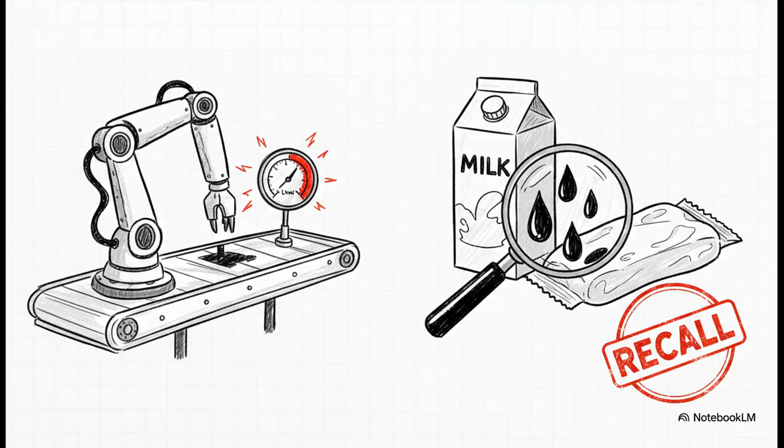Picture this. Alex is on the factory floor. Alarms are blaring everywhere. The production line, which was this perfect symphony of automation just minutes ago, has gone completely silent. Alex is smack in the middle of a full-blown shutdown, and the pressure is seriously on. So Alex is dealing with a double whammy here. First, the easy part. Pneumatic actuators are failing all down the line because the system's air pressure is just tanking.

But the second issue, it's so much worse. Quality control has detected trace amounts of oil in the product. This isn't just a shutdown anymore. We're talking about a potential recall that could cost millions and wreck the company's reputation.

Okay, so what do you do? A less experienced engineer might just run straight to the compressor room and start tinkering. But Alex knows better. The compressor is the heart of the system, sure, but the problem could be anywhere in the system's arteries. So the first step is a full system diagnosis. Alex knows better than to guess, so the approach is super methodical.

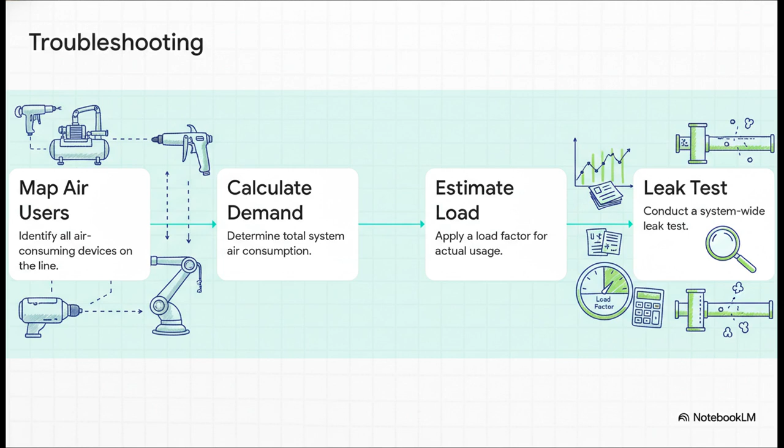First things first, you identify every single device that uses compressed air. Then you grab the manufacturer data and calculate the total potential demand. Of course, not everything runs at once, so you apply a load factor to get a more realistic picture of usage. And finally, the most critical step of all, conducting a system-wide leak test while everything is shut down.

So, okay, the leaks explain the pressure drop, for sure. But what about the oil contamination? Now that Alex has a clear picture of the system's massive demand, which is way bigger than it should be because of the leaks, it's finally time to turn to the source of it all, the compressor itself. And here is the culprit.

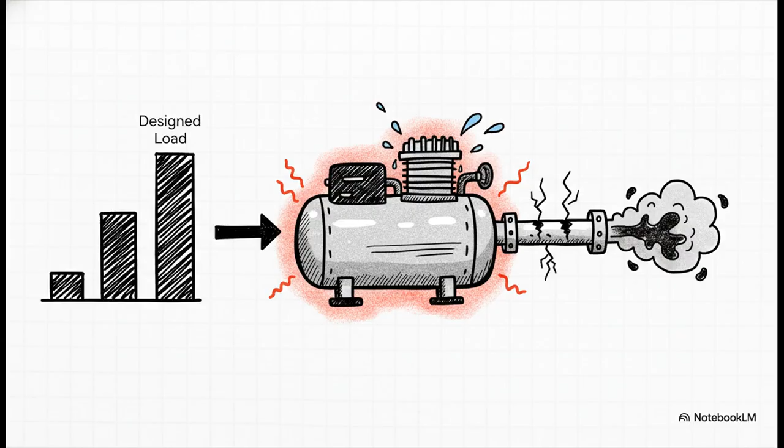See, the compressor was sized for the original designed load of the factory, but after years of these tiny leaks adding up, the actual load is way, way higher. The machine is running constantly, 24/7, just to keep up, and it's overheating. And as it overheats, its oil-based lubrication starts to break down and get carried over into the airstream. That's our contamination. So a replacement is definitely needed.

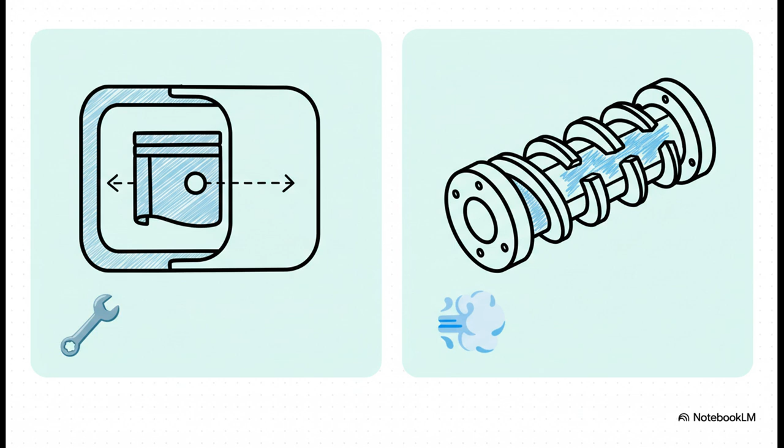Let's look at the main options Alex is considering. This slide compares the two most common types of positive displacement machines. On one hand, you have your reciprocating compressor, which is kind of like a car engine's piston. Super efficient, but it can be a bit high maintenance. Then you've got the rotary screw. It's compact, gives you a nice smooth output, but it can be less efficient if you're not running it at full load.

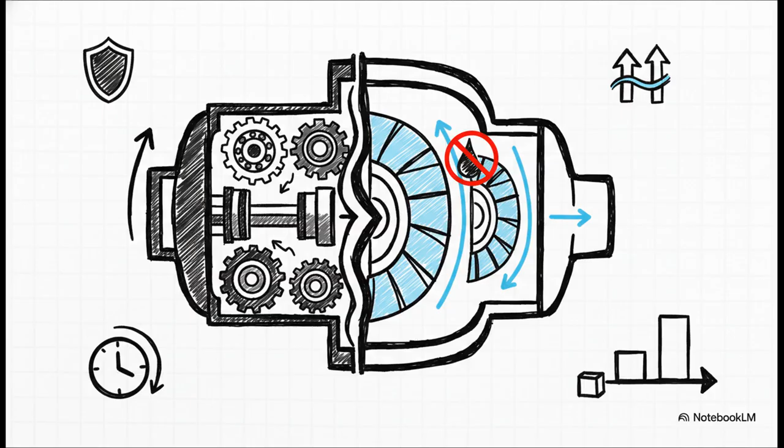This isn't just a nice to have. For a food-grade application, it is completely non-negotiable. So that leads us to our next section. Let's really dig into what oil-free actually means. It's a simple definition, but it has huge implications.

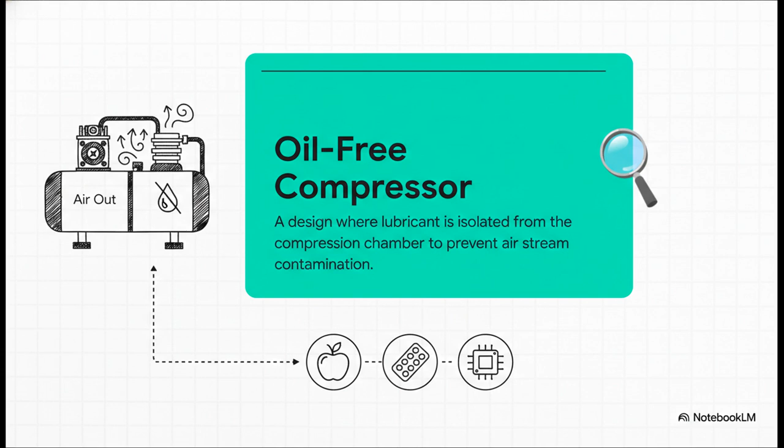But the real key feature is that thing called a distance piece. It physically separates the oily crankcase from the compression cylinder, making it literally impossible for oil to travel up the piston rod and into the air.

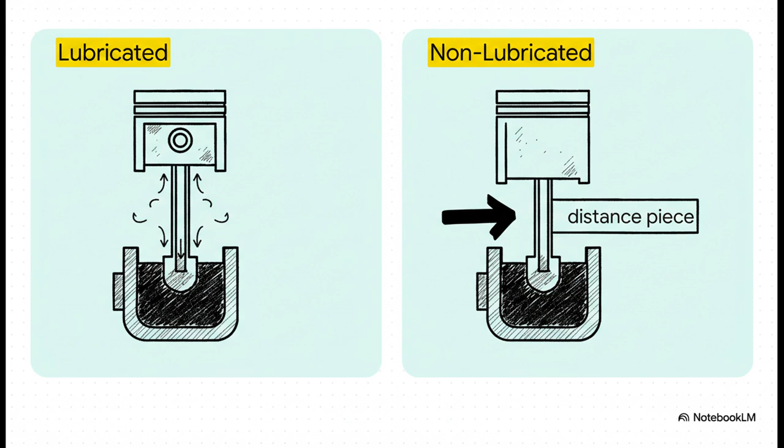Okay, armed with all this knowledge, Alex puts together a final checklist for the new machine. Number 1, air quality. Must be 100% oil-free, no exceptions. Number 2, capacity. This time it's sized for the real demand, plus a buffer for future growth. And since this new machine will be a base load unit running all the time, full load efficiency and reliability are critical to keep those operating costs down.

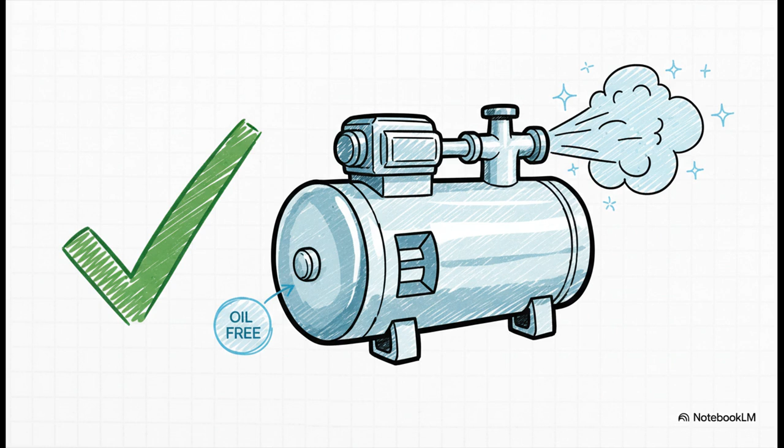And here it is, the final choice. Alex selects a crosshead type reciprocating compressor. Now, this design offers the best of both worlds. You get the high efficiency of a reciprocating machine, but it's combined with that non-lubricated distance piece design that guarantees 100% oil-free air. It's the perfect blend of efficiency and purity for this job.

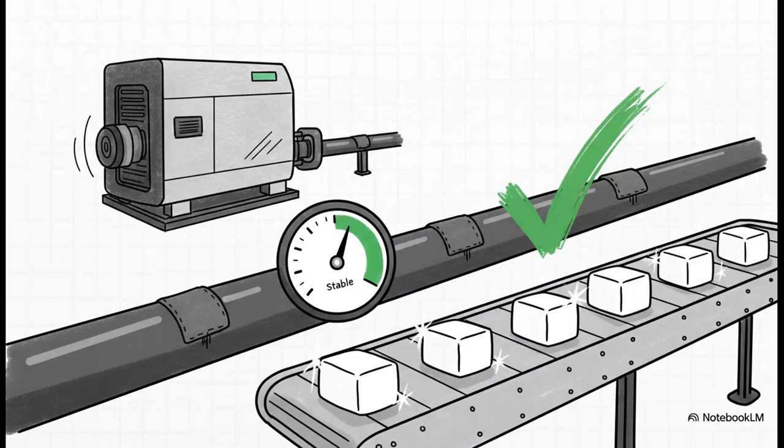And with the new compressor installed and the major leaks repaired, the outcome is a total success. The system pressure is stable, even during peak demand. The product integrity is completely secure. And most importantly, the factory is back up and running. A major crisis was averted through methodical, solid engineering.

Alex's story is a perfect case study of how you should diagnose these problems. And it also brings up some of the most common questions that engineers like you face all the time. So let's use what we've just learned to answer them directly. This is without a doubt the most critical question. Getting this wrong was the root of Alex's entire problem. So how do you get it right?

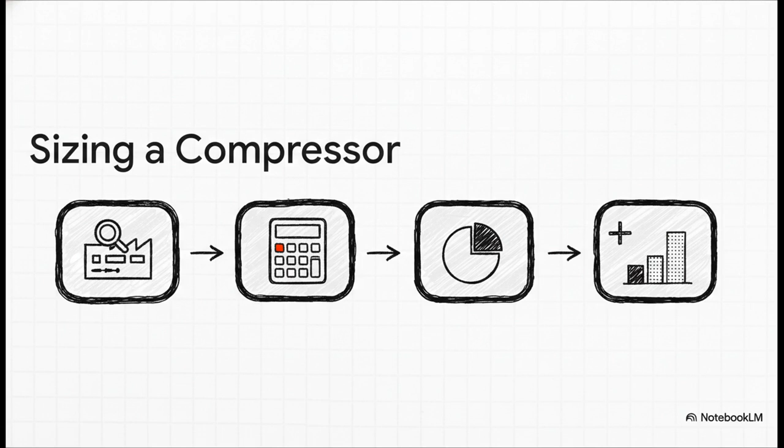Well, it really just boils down to following the exact process Alex did. You have to account for every single device, calculate their consumption, apply a realistic load factor, and then, and this is so critical, you add a margin. A 10% buffer for existing leaks is pretty standard, plus you always want to plan for future growth. Don't size for today, size for tomorrow.

The next big question is all about air quality. If you absolutely, positively cannot have oil in your system, what are your go-to options? Here's the straight answer for you. Centrifugal and liquid ring compressors are, just by their very nature, oil-free. The air never even comes close to the lubricant. For the other big types, reciprocating, screw, and lobe, you have to look for specific non-lubricated or oil-free models that have special design features, like that crosshead design Alex chose.

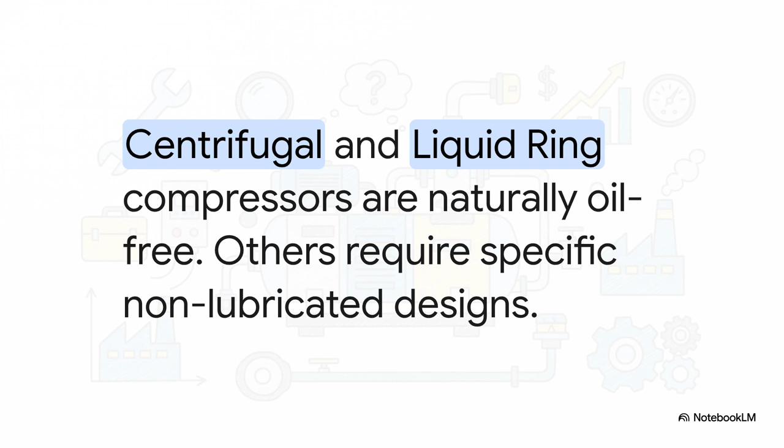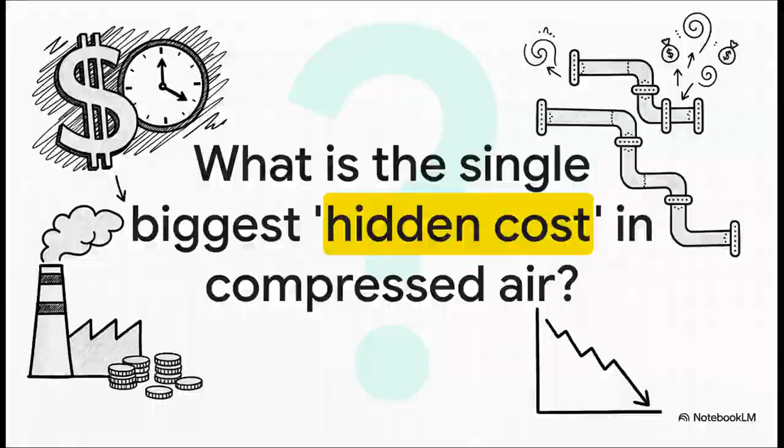And finally, let's talk about money. Where do most compressed air systems waste the most energy without anybody even noticing? You know, this quote from our source material just says it all perfectly. It's not about some massive pipe failure, it's death by 1,000 cuts. The single biggest hidden cost in almost every compressed air system out there is the accumulated waste from dozens or even hundreds of small, undetected leaks.

So we'll leave you with this question to think about for your own system. Just because your compressor is running doesn't mean it's healthy. Is it meeting your demand efficiently? Or is it like Alex's old machine, just working overtime to pump expensive, compressed air out of 100 tiny holes, running up a massive energy bill in the process?